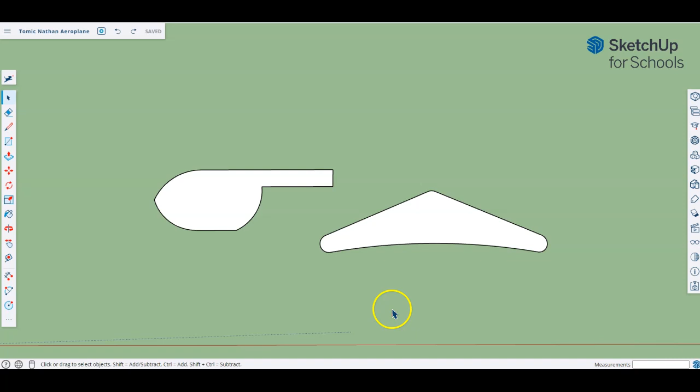Hello students, this video we're going to take what are currently flat pieces that we've been designing for templates and now turn them into the three-dimensional pieces that we'll use for the model. If you have been following along with the videos, you have the two pieces here, they are flat. So the first thing is let's just turn them into three-dimensional shapes.

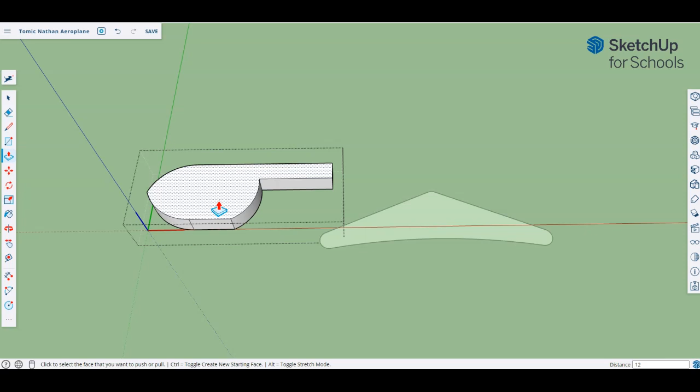That's pretty straightforward. We're going to select, let's start with the body. Because it is a component, we need to double click to edit it. We're then going to use our push-pull tool that we're becoming quite familiar with, and we're going to pull it out and make it 12 millimeters, because that is the measurement we were told on our class page for the thickness of the material we'll be using.

In a similar fashion, we're going to come to the wing, so let's select the wing, double-click, use our push-pull tool, and on our class page we were told that this would be 3 millimeters. I'm typing the number in, pressing enter, and getting the pieces there.

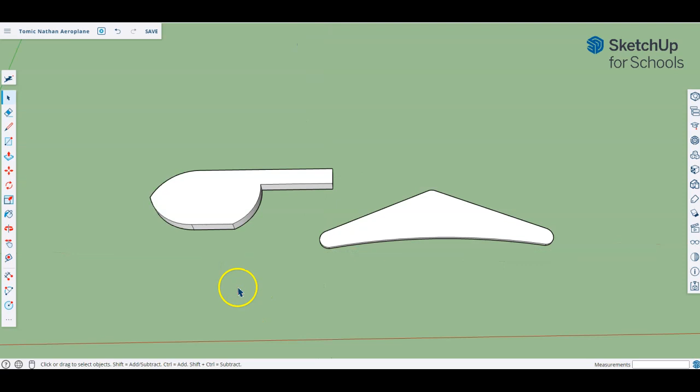Okay, so now I have two three-dimensional shapes, but they are both still lying down flat, and I'd kind of like to stand the airplane up onto its base, and then also later on we'll move the wing and rotate it around as well.

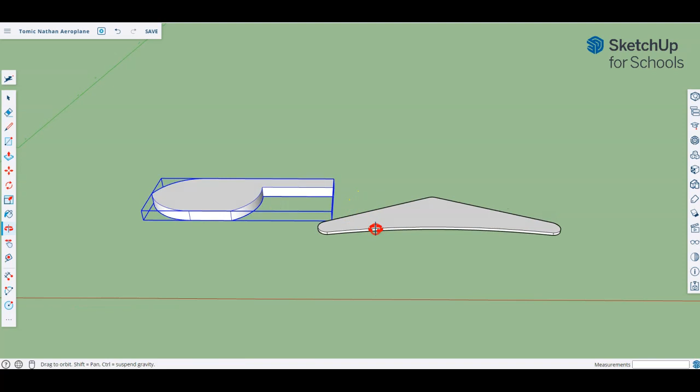So let's look at rotation. What I'm going to do is select my airplane, and I'm going to rotate my view around to the back in this case. The reason I've chosen the back is we still have a fairly flat piece here. If I try to do it from the front, which is all curved, it's going to be a lot harder to find some points to grab and rotate with.

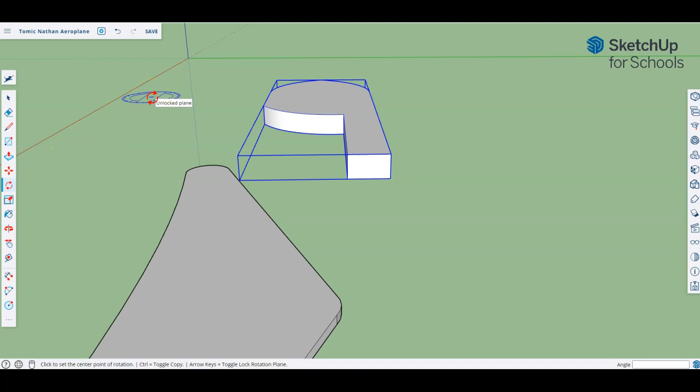So if I use this particular place, I'm going to take my rotation tool, and I'm going to rotate around the red axis. The red axis being this one along here, standing my airplane up. Just like I've done previously, I'm going to find a point on my red axis, a second point, and I'm basically going to pivot.

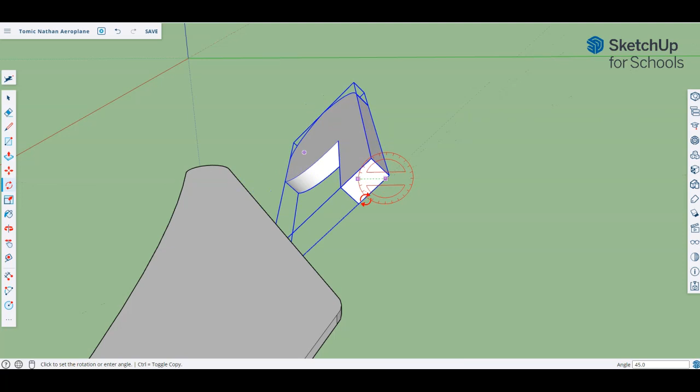You remember the first point is your pivot point, the second point is like your handle, and I want to pivot. Now, if I want to stand it up, the way I've got it, I'm actually pivoting down, so I'm going to be pivoting by 90 degrees. So pivot, like most tools, in some amount, doesn't matter how much, then type the amount that you want in, press enter, and there you go. It has rotated for us.

Right, so there is our piece essentially now standing up. Let's choose our selection tool just so we don't accidentally rotate further.

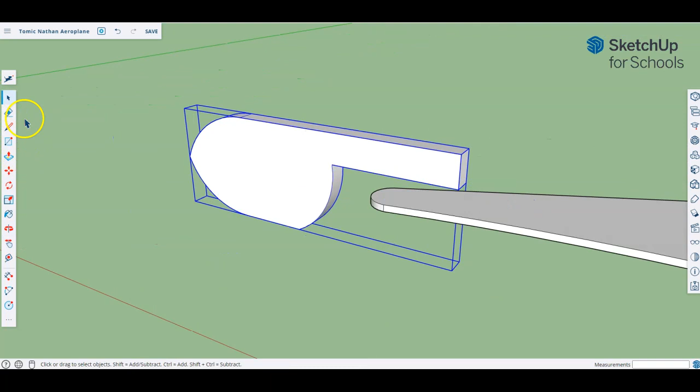Right, let's now have a little think about our wing. Again, the wing is in the right plane horizontally, but we want to rotate it around. In a similar way, I'm going to view it in a way that makes sense for the type of rotation I want to do. I'm going to make sure I've selected it, and I'm going to get my rotation tool, and I'm going to think about how to rotate this.

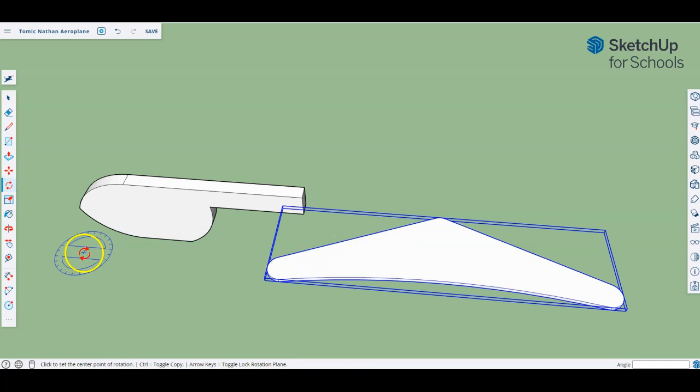So again, I want to rotate in this plane, so that's okay. I'm just going to click 2 points on here and rotate it. Again, it's a 90-degree rotation that we want in my case, because that's the way I drew them. So rotate some amount and type in 90 and press enter. And again, I now have my two pieces rotated.

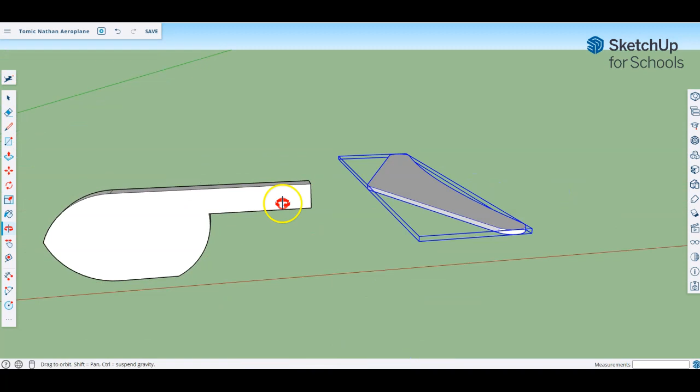Now, I didn't say it before, but notice that I didn't double click on the pieces or the components when I was trying to move them and rotate them, because I wanted to rotate them as a whole thing, not rotate individual parts. So there's no need to double click and go into the editing mode.

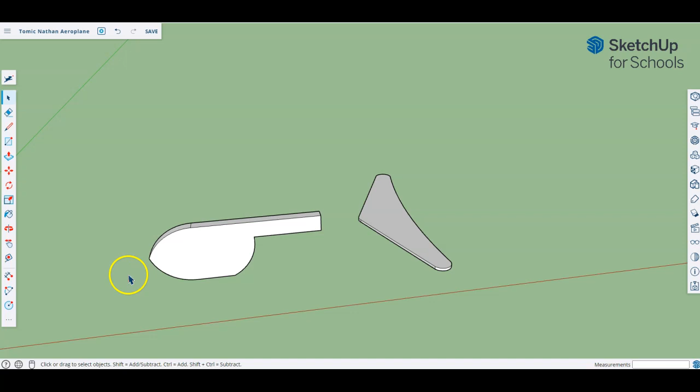All right, now that I've got these rotated properly, I need to position them. We have a symmetrical wing, and we have a body that is a certain thickness. So really what I want is the perfect tip of this wing to line up with the middle point, if you like, of the thickness of the body.

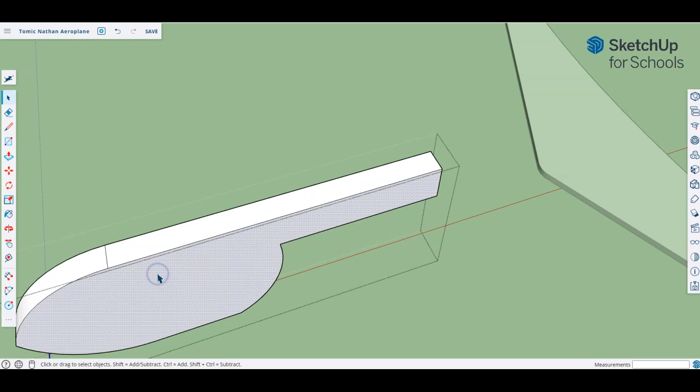So what I'm going to do is draw again a construction line on my aeroplane body. Now I'm not going into edit, so I'm not actually editing the aeroplane. I'm not actually drawing on the airplane. What I'm drawing is a construction line essentially sitting on top of this component.

So I'm coming and drawing it in, and I know that the airplane body is 12 millimeters because I just did it. So I'm setting it at 6. That gives me a nice division line down here.

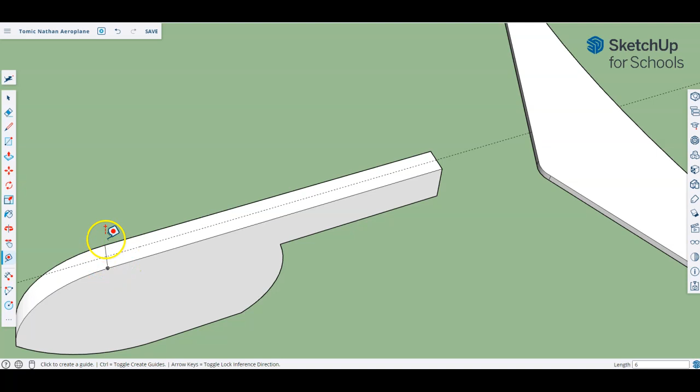I happen to have this line in my airplane because of the way I started my curve. And I also happen to know that was the 70 millimeter one from earlier, but you might not have a line there, or you might have a line somewhere else, and you want to work out where to put your aeroplane wing. You might decide to put some extra lines in here to help guide it, but this center line is the one that I really care about.

Now the next thing is I want to think about my wing.

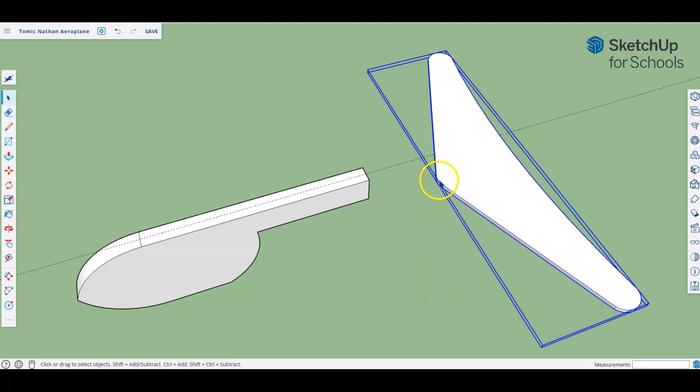Okay, so same thing, my wing needs to have a center point. So what I'm going to do is draw a center point, also a construction line on here. But I'm going to flip over first because I don't want to draw the line on top. I want to draw it on the bottom of this piece. That's going to be important when I try to lock them together, because if I draw it on top and try to use it to lock to this spot here, it's going to sink the wing into the aeroplane, and that's no good for what I'm trying to achieve.

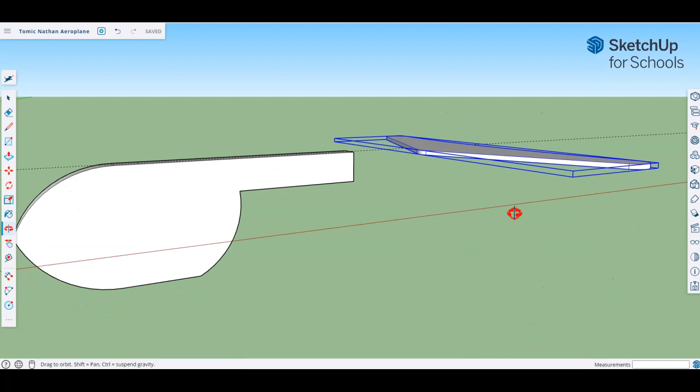Okay, so I'm actually going to firstly rotate, so I'm technically looking at the bottom of my wing. Doesn't have to be straight, but just so I can see the bottom. Then I want to find the middle of this whole piece. So just like before, with the piece selected, I can draw a construction line.

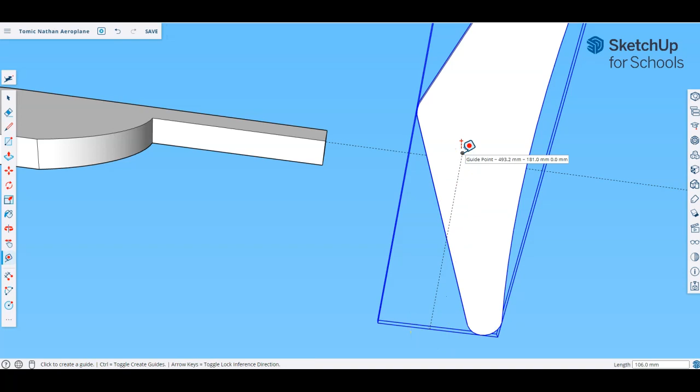Now I know from earlier that the whole wing is 250 millimeters wide. So if I draw a construction line on here, that is... I didn't get it right. Sorry, I've got to get onto a piece of the aeroplane. That's not working properly, sorry, try one more time. Just trying to catch on to the thing there. 250 - no, so not, why am I saying 250? Sorry everybody, 125. I can't do maths in my head.

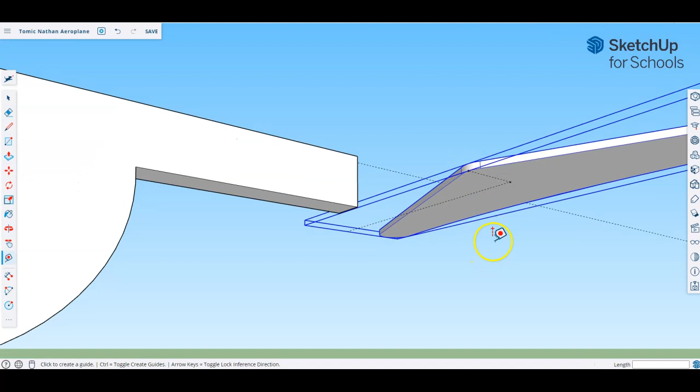So if I do that, I've got a nice construction point, and I'm going to bring it forward to join onto the body of the airplane, and I'm just locking it on. I'm not actually putting a measurement here, and I've now got a point that is exactly in the middle. That's probably one of the most confusing parts of this whole process. So I need to find the middle across, and then I just need to come up to join to the front of the aeroplane. Okay.

If that doesn't work for you, you can just eyeball it and work out where you think it should go. But I'm trying to be as accurate as possible.

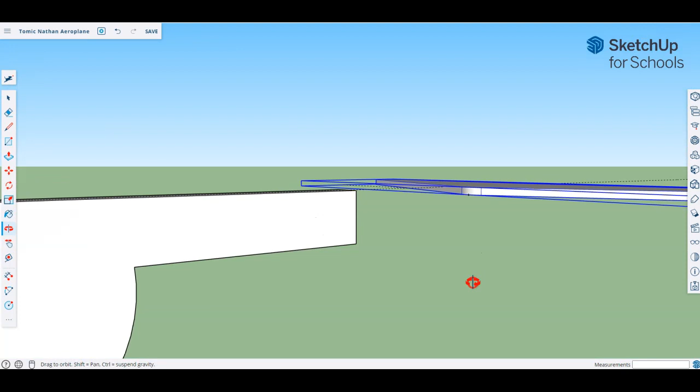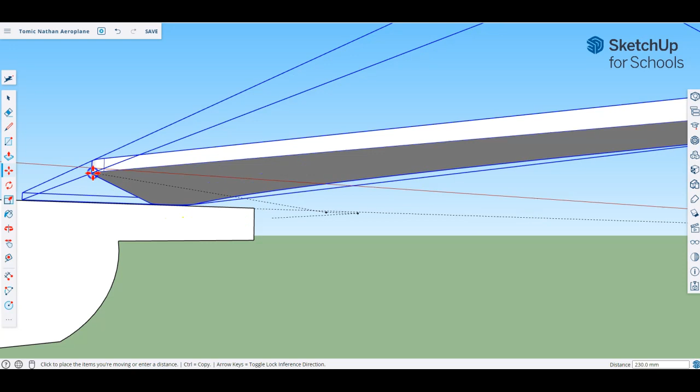Now, next thing is I need to move this aeroplane wing. So I'm going to first make sure that the wing is selected. I'm going to grab it by that point that we just made. So here it is there. And I'm going to bring it forward. I'm lucky because I'm using a mouse that I can zoom out and rotate at the same time to try and position this in a way that I can see.

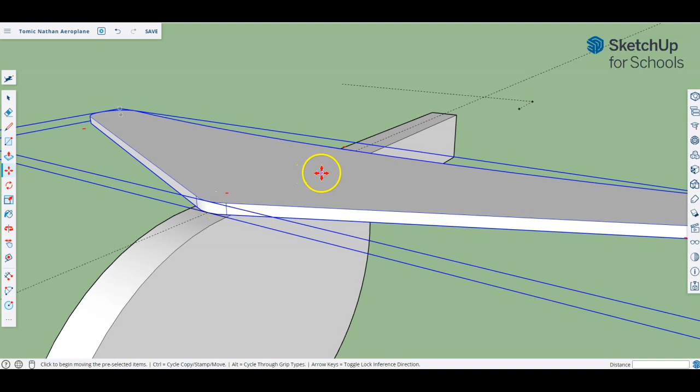There we go. Because what I'm trying to do, like we've seen earlier, is trying to lock that point to the one that I made here. So I've locked those two together. Notice my construction lines didn't move - that's okay because they were there just to get that point. I've now got it in the right spot. If I wanted those lines to follow the wing, I would actually have to edit the wing and draw them on and then take them off later.

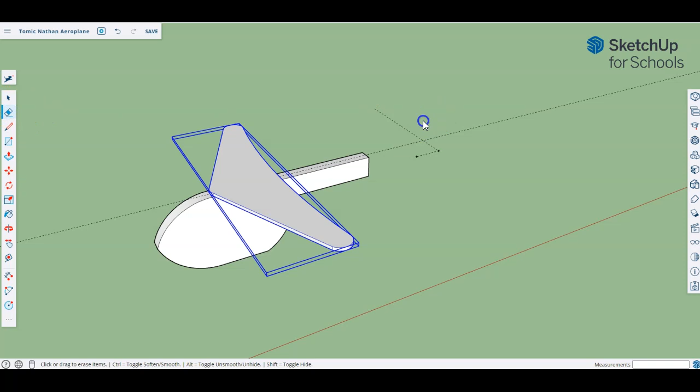But either way, I've ended up where I want to be. I've got my aeroplane wing sitting on top of the body of my aeroplane where I want it to be. Oops, I just moved accidentally, so press escape to undo that. And I'm going to clean up, of course, those construction lines that I just drew. If I can ever get my rubber - there it is, sorry. There you go. So I have got my aeroplane wing in the right spot.

Again, I will accept, honestly, that this can be one of the more complex parts of this whole build so far, because you have to really think about positioning. You have to really try and get things lined up. So do your absolute best. Obviously, watch this several times if you need to. Think about where you can draw construction lines to help you find points. Remember, if you've got 2 points, you can lock those together - that makes it so much easier.

And I know I sort of said it really much on the fly, but if you do have access to a mouse, it really makes these things so much easier. Because while you're holding down that button and dragging that wing around, being able to also use the scroll wheel to zoom in and out and reposition things does make this so much easier. So if you've got access to a mouse, please, I strongly encourage you to use it.

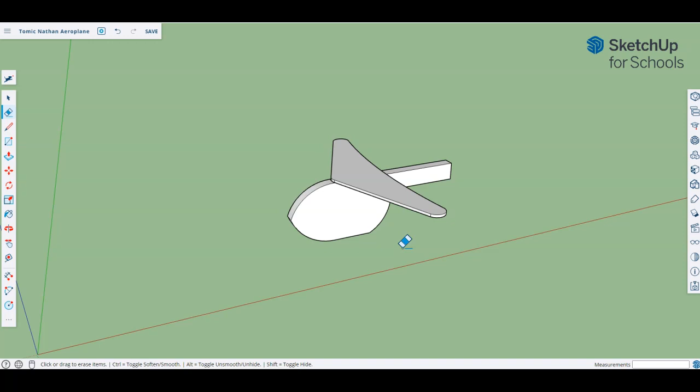But hopefully you have got to this point now. And again, obviously make sure you're saving regularly, and we will be looking at how we bring in some other pieces - in fact, pieces that have been made for you - and add them to this aeroplane quite soon. So that's in the next lesson.